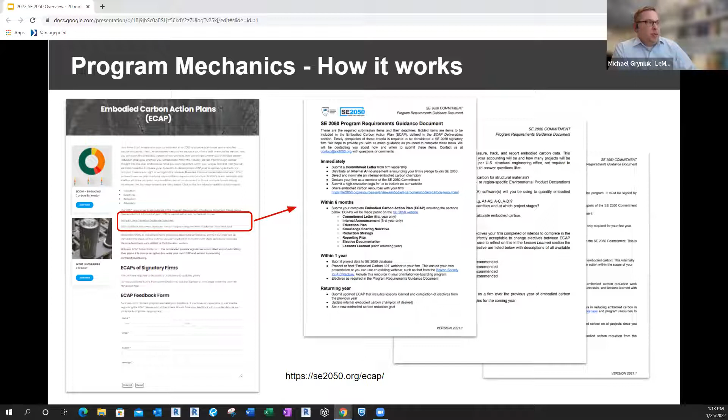A central component of that is of course the ECAP, or the Embodied Carbon Action Plan, which has 4 building blocks: education, reporting, reduction, and advocacy. Each block has a minimum number of requirements, and we'll briefly touch on those in a minute. All of those requirements are in great detail in our ECAP guidance document found on our website here. I know you can't read that page, but trust me, just click that link and you'll get the program requirements.

But briefly, I'll say education is really the first step to increase the engagement within your firm. So we are requiring firms to designate a firm-wide embodied carbon champion, put together a narrative of what the firm's education plan is to educate their staff, and commit to presenting an embodied carbon 101 presentation to the firm within the first year, and putting this all in writing.

Reporting. So obviously quality data, and we will definitely get into this later, is essential to making any sort of informed decisions and developing appropriate embodied carbon reduction targets. We set a relatively low bar of entry to get more firms to commit early on in the program. And so we are only requiring 2 times the number of firm offices. So if you have 1 office, that's 2 projects a year. And if you have multiple offices, no more than 5 projects a year. In the future, we do plan to increase that number.

The requirement here on reduction strategies is that, and this is where sharing and sort of helping the greater movement, take tremendous advantage of all of our efforts by sharing the information. So we'd like firms to set internal goals and then report back on that progress, what worked, what didn't work. I don't know about you, but I personally tend to learn a lot more from hearing what hasn't worked than really just seeing these really nice diagrams and sort of the best thing that happened on individual projects. I think we've all found that we do a lot better course correcting when adjusting for some things that didn't necessarily work out.

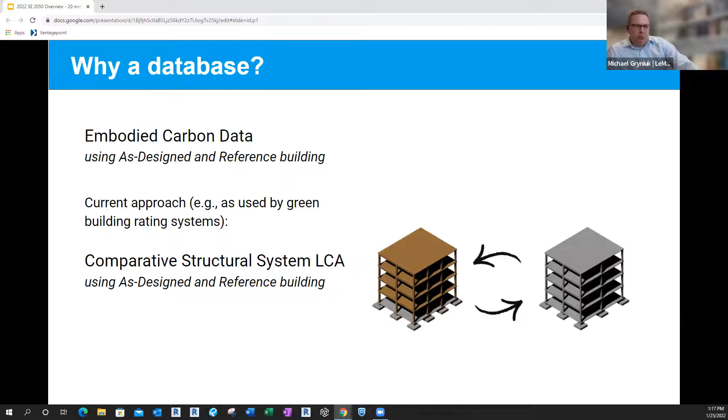I'm going to briefly talk about our database. There's a lot. I mean, we could give multiple presentations on this, but I'd like to just give a quick overview and then get into the Q&A session with the panel. So I don't think it's any secret why we might want a database. I'll say that green rating systems nowadays really require you to establish a so-called baseline building and make substantive reductions from that baseline of what would be normally designed or built, and compare it to the new project and show some sort of reduction, which is fantastic. Okay, there's no question about it.

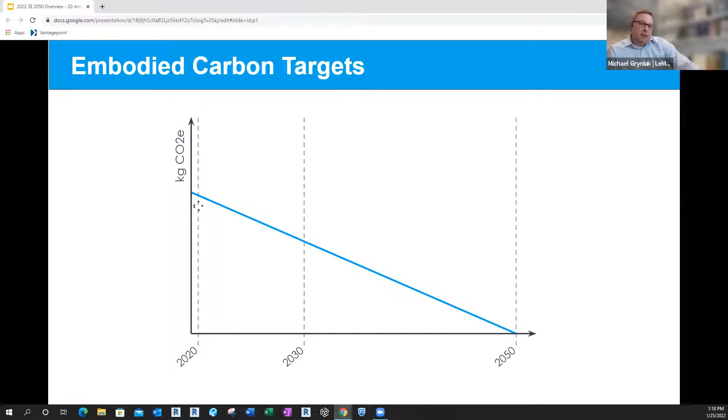But the reality is, if we have to get to net zero by 2050, which we all recognize, and frankly, maybe even before 2050, sort of reduced embodied carbon from a baseline may actually put you well above the curve. Now, this is a little bit of a can of worms. We understand that there are all sorts of project constraints and requirements and reasons why one building might have more embodied carbon than the next. But putting that all to the side, it is still important to see where your building lands with respect to the targets.

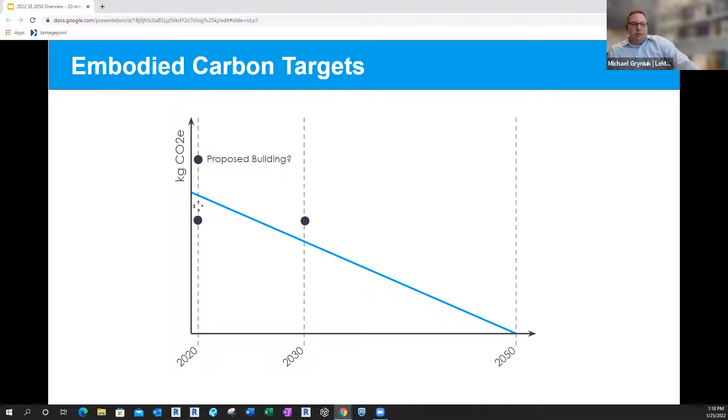Now, let's say you were in 2020 below that line. That does feel good, but what if you employed the same strategies 10 years later? You would actually be sort of above the target. Okay, so that's really the general concept of why we need some sort of database to allow us to ensure that we're sort of heading in the right direction.

There have been other database precedents put out there, and some of them good. A lot of them, frankly, at this point, identified ways to improve, and so we're trying to leverage the work that they did previously, and try to come up with a more structural focused database that makes sense to a structural engineer, isn't overly complicated, and is accessible to the profession.

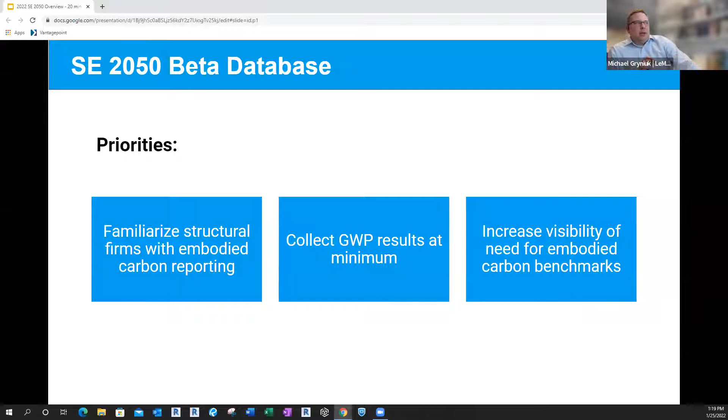So our priorities, knowing that this was our first go at it, was to just familiarize structural firms with embodied carbon reporting. We sort of have to take baby steps in the beginning here, and we're only asking people to submit global warming potential results at a minimum. Of course, we would eventually like to also collect structural material quantities, but for now, it's just global warming potential. And we're really hoping to highlight trends and the visibility of why we need to continue to track and collect even more data to establish those trends and benchmarks in the future.

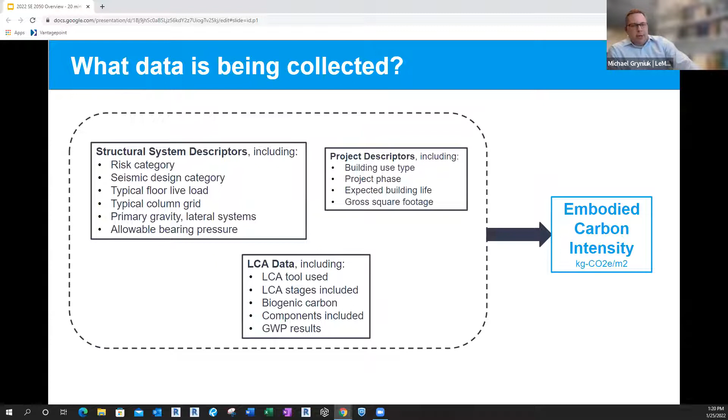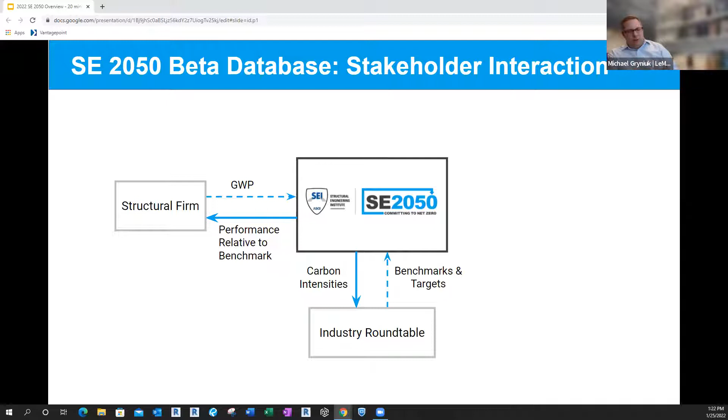Basically, this diagram is to demonstrate that we are trying to talk to as many stakeholders as possible and really talking to the industry. We're really not trying to be off in the corner doing our own thing and ignoring what else is going on. We all know that there's quite a bit going on in embodied carbon. So, the concept is that the structural firm submits the global warming potential into our database. Those embodied carbon intensities are then reviewed and discussed with an industry roundtable. Perhaps a third party group is assessing the data. Those targets or trends and benchmarks are put back into the database, and then the structural firm can review their performance relative to that information.

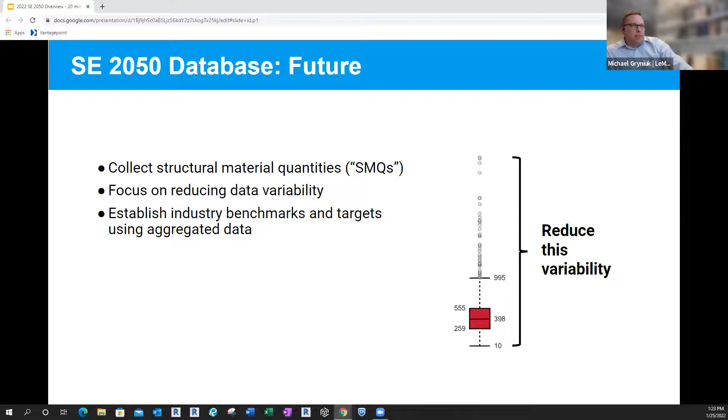In the future, we very much want to and plan to include structural material quantities for several reasons. Structural material quantities is something that structural engineers care a whole lot about. It also allows us to back check the embodied carbon numbers if they make sense. We think this will also help reduce the variability. And so there's a lot of things that we'd like to do in the future, hopefully in the next year or two. And then the concept would be if we had the SMQs from the database, those could be exported to any LCA tool that's commercially available, and then GWP numbers could be produced directly instead of having the structural firm produce the global warming potential.

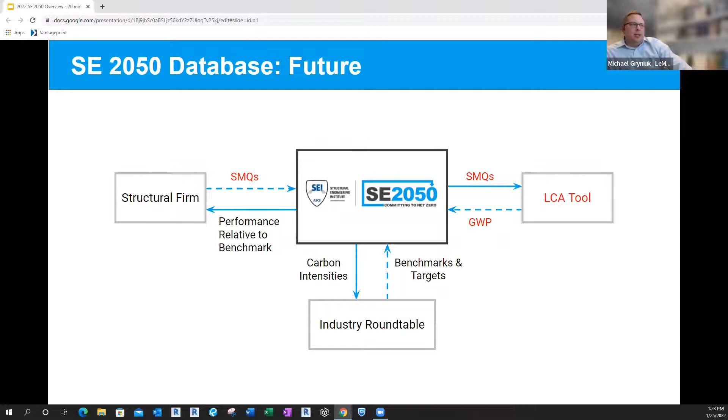We could just collect SMQs and then run it through any tool that we want while still getting industry feedback. So I'm going to wrap it there. And if we have time, I'll get into additional resources that we have at SE2050.

But for now, I'll just leave it with, here are the 71 firms committed, 70 projects submitted to the database, and at least 41, I think that number is higher now, of ECAPs received. So pretty exciting stuff. And I'm very, very much looking forward to hearing from this impressive group of structural engineers.

So with that, I'm going to stop sharing my screen and hand it off to Patrick Kenny and Michael Cropper of Thornton Tomasetti. Thank you, Michael. Hopefully everyone can see my screen.

My name is Michael Cropper. I'm a senior associate structural engineer with Thornton Tomasetti in our Washington, D.C. office. And we've got just a couple of slides to go through about our approach at Thornton Tomasetti with embodied carbon. I've been with TT about 15 years. As a firm, we've been collecting embodied carbon data on our own projects for over 10 years. And some of that data is on the screen.

Admittedly, it was a lonely experience for those who were collecting that data a number of years ago, because embodied carbon didn't even have the traction that it does today in industry. So for me as a structural engineer, embodied carbon's been new in the last 2 or 3 years. So this effort among the entire industry, and especially among us structural engineers, is new and fresh, and everybody's excited about it, which is great.

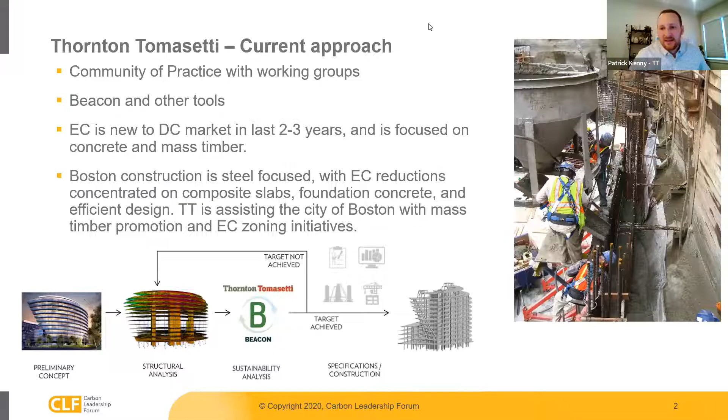I think we're teaming up KPFF now, Janet and Shana. Yep. Hi, everybody. I'm Janet Ranf from the St. Louis office of KPFF, and I'm joined with Shana Kelly from our Seattle office. And we're going to talk about how SE2050 has been incorporated into our firm. Shana will start off talking about how we got here.

Yeah, thanks, Janet. So KPFF had signed on to the 2030 Challenge a number of years ago, but when the SE2050 commitment came up, that's really about committing to something and putting down on paper what you're committing to do. And so we had the option to go in and sign the letter and say we were going to do it. But what we really wanted to do, as Mike mentioned, was bring along everybody in our office with us, including all of the leadership.

And so we actually developed our ECAP before we even signed that letter. And that ended up being this multiple page thing detailing out everything that we were planning to do. But for that to be ingested by everybody would have been difficult. So what we found really helpful was to put together a frequently asked questions document to take around to all the different leaderships and offices to answer their basic questions, which were: why is this important? What can we as structural engineers do about it? And what are we promising to do as part of joining this commitment?

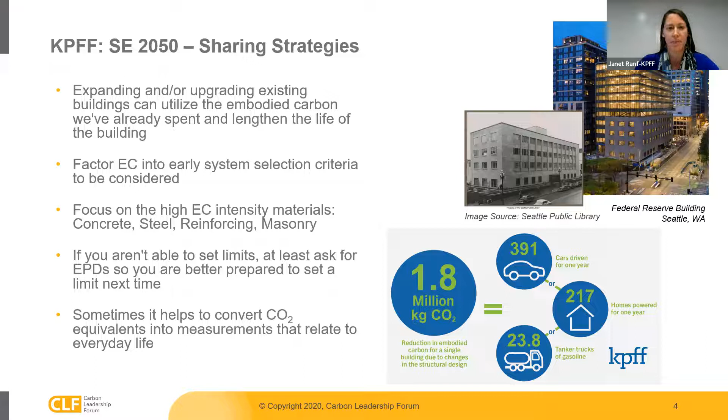How many gallons of gas, how much can you heat a home for this amount of embodied carbon? So we're engineers, we like quantifying the impacts. At KPFF, we use Tally for life cycle assessment and EC3 for carbon and global warming potential tracking. We have an EC3 account that allows members across the firm, across the country, to explore the shared buildings and also easily go in and create their own project. And we're currently in the process of creating our own firm-wide database for tracking embodied carbon in our projects.

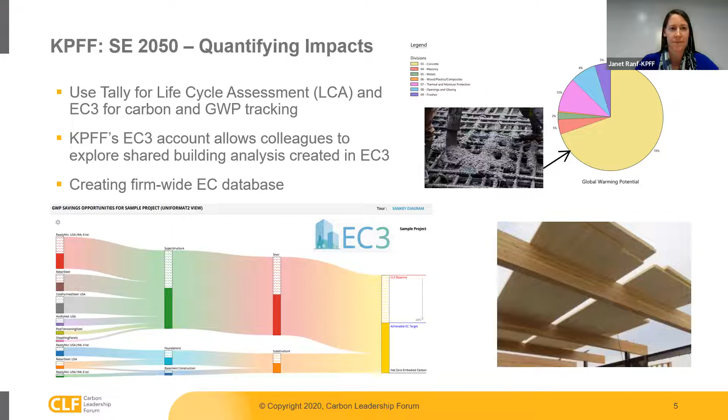We also want to make sure we're pushing the envelope and exploring new technologies. We can share ideas on the latest advancements in carbon reduction with our project teams and help explain what code and structural impacts there may be. As structural engineers, we're not often the ones who come up with these new ideas, but we certainly can help implement that into our projects.

We try to find areas in the projects that are responsible areas to experiment with the latest technologies. If we don't know how something is going to behave, we want to make sure it's not in a highly exposed, visible area. This is, again, something where our architectural partners can help us come up with areas that may be a spot that we can go and kind of play and experiment with these new technologies.

We want to explore unique systems that might be able to reduce quantities in the structure. For instance, could a hybrid system allow you to do more reductions in structural quantities? There's a picture there of some hybrid CLT testing that we did at the University of Washington, where the CLT acts compositely with the concrete.

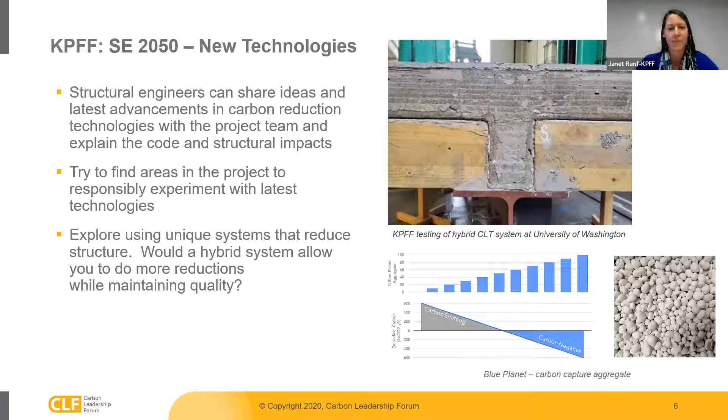So bringing it back to the Midwest, where sustainability may not be on the forefront of every owner's mind, structural engineers can initiate the sustainability conversation with the design team. This, I think, may be one of the best things to come out of SE2050, besides all this glorious data, is really pushing the structural engineers to be the ones to advocate for sustainability.

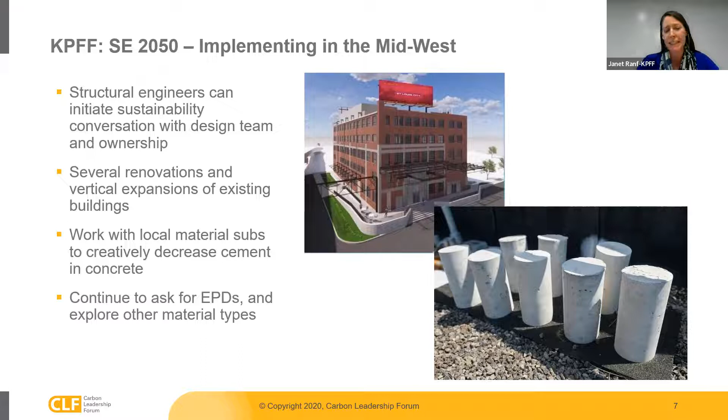In St. Louis, where I work, we do several renovations and vertical expansions to existing buildings. We try to work with local material subs to creatively decrease the cement in concrete and get a lower embodied carbon material. And we're continuing to ask for EPDs, like I said, that may actually end up giving us a lower embodied carbon material anyway, and also push our owners to look at different material types.

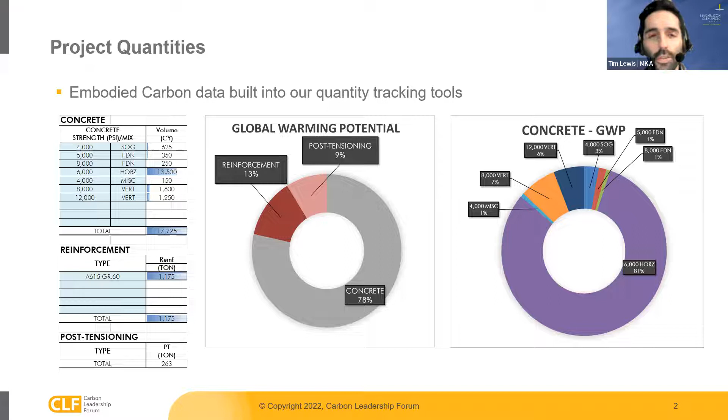There's a lot of variability in materials, and the point here being that we want to build mechanisms and tools and put these choices into the hands of our engineers so that we can make informed choices with our client, and basically giving them options, different systems to consider.

And every building's different. This is an office building and timber works well for it, but a stadium or an arena or a high rise, all are going to have different answers. And so it's important to us to have the right tools in place that have the right embodied carbon numbers so that we can consider these alternatives.

And so building these tools out has been a huge effort that we've undertaken at MKA, and it's yielded some really great results where we can pretty quickly come up with these types of pieces of information to make good decisions in our projects.

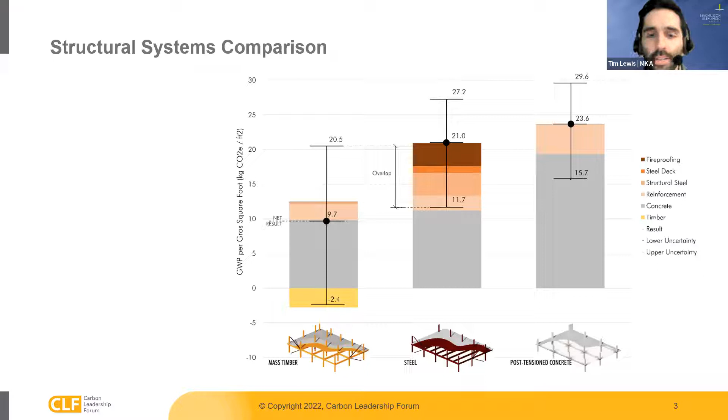So compiling the data is the first step and fairly straightforward. Essentially, quantities times GWP equals embodied carbon, but data is only useful if it's quality data, and that's the challenging part of the puzzle. SE 2050 has done a really great job of starting to create a database that spans different regions, different firms, project types, but it's important that the data being compared in the database are apples to apples. Within whole building life cycle analyses, for example, there's a lot of uncertainty and speculation.

The number in the database doesn't necessarily paint the full picture of a project. For example, are we all considering the same lifespan of a project? Some quantities might just quantify the product stage A1 through A3, while others consider the entire end of life and replacement of systems on a different design life.

So we look forward to partnering with SE 2050 and other structural engineering firms to come up with standards and a sort of a basis of analysis. And we're excited for this two-way street with SE 2050.

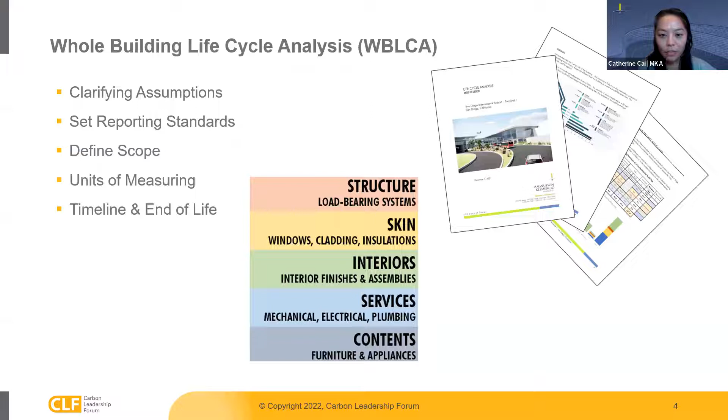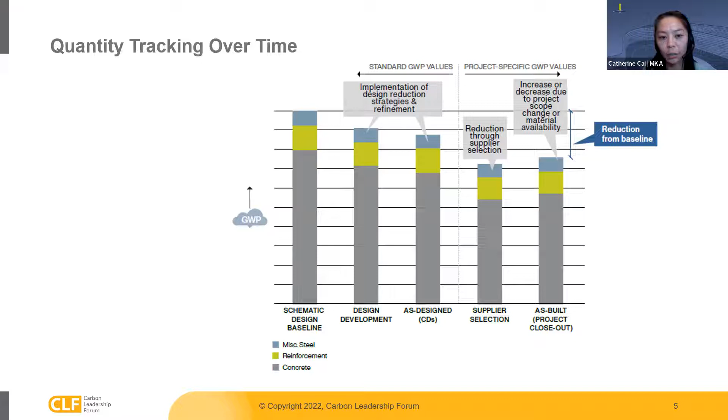Within MKA, we've seen a lot of potential through managing a project like a budget, treating carbon like money. So in this graph, you can see moving left to right through different project phases, we have seen opportunities to implement design reduction strategies throughout the design stage, and then even going into supplier selection and vendor selection. Overall, we've seen a reduction from our baseline simply by talking and asking about sustainability within a project.

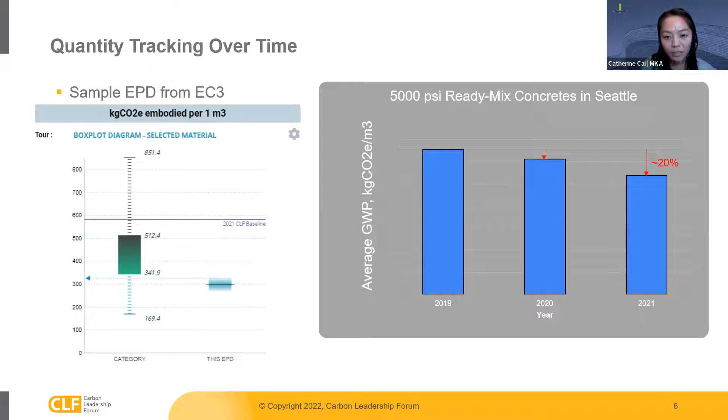And we've also at MKA decided to start this MKA Foundation, in which we are investing not just time and effort, but also proper money to fund embodied carbon research and try to make technical advancements and look at hybrid structures, a lot like what the KPFF team was discussing.

And I think collectively, it's fun to look at all this happening across the industry and feel like we're each sort of pushing for these unique solutions and trying to get a lower carbon answer so that we can all share the results and drive that result together. And with that, I think this SE2050 is a wonderful space to do it in. I think putting all of our heads together and sharing what works, what didn't, here's how we measure things, what's our baseline, those conversations are all super productive.

And we also look at this as something that's very integral to our practice. It's a space where structural engineers can lead because we understand the quantities in our buildings, and the better we understand those quantities, it's basically a better result for the project. We're building with less material. We can sort of drive this whole conversation towards carbon neutral buildings.

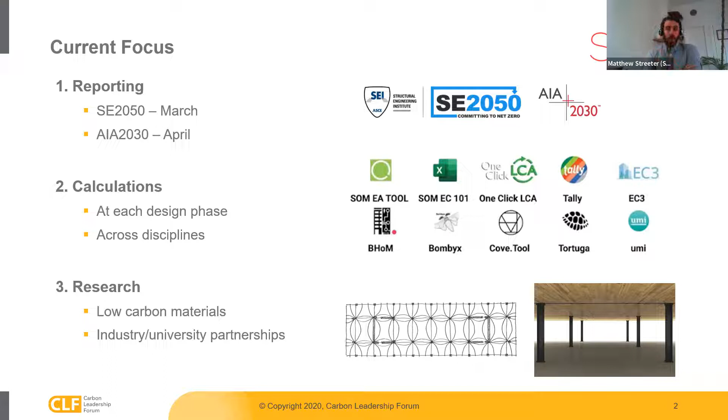And then the third area of focus is in our research group. So we're trying as much as possible to have initiatives in which we're working with partners from industry, but also from academia, to try and find low carbon materials and explore new structural systems that could potentially help us to reduce embodied carbon as much as possible.

And I think what we're seeing, and it's probably a common theme among the firms here, is along different heights, and that could be expanded to different areas, different hazards, different programs, there's a lot of different solutions. So for this height example, at a smaller scale building, we do have more opportunities to use low carbon materials like timber, and from a code perspective, it's a lot easier to get into construction.

As we move to taller buildings, we see there's smaller decisions that we can make, but from a variety of constraints, there's only certain decisions we can make, and our reductions are maybe not as huge as we would like. And then as you move to very tall buildings, again, those constraints become even tougher, and we can make decisions on form to reduce wind loads, and we see a strong impact there. But we don't see that we have a solution yet to get to zero for a really tall building.

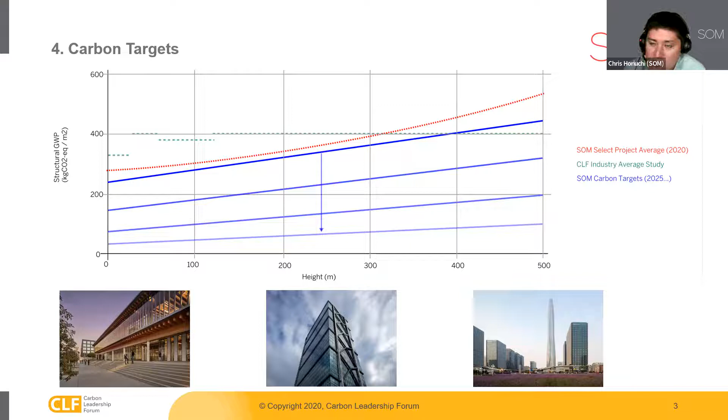So thank you. With that, I'll turn it over to Teresa at WSP. Hi, I'm here. I thought I lost Zoom for a moment.

So I'm with WSP, and we have been looking at future ready, at sustainability, at SE2050 for quite a few years. And we have just recently, in the fall, written our commitment letter to the SE2050 program. Like other firms mentioned, we had to talk about it quite a lot and look at what our business was doing already. And we felt that we could really offer a lot to the SE2050 program. Wanting to bring SE2050 beyond buildings into infrastructure was the tipping point that brought WSP into the SE2050 commitment, which I'm very excited about.

WSP is a worldwide company, and our cousins in the UK have been doing an awful lot of things in the embodied carbon world that it sort of felt like there were all these different entities of WSP doing something. So the very first thing that we felt we needed to do when we joined the SE2050 commitment was just to look within our own company and see what was happening, what we could use here in the United States, what makes sense to the business lines here in our country, and just leverage the information and products that were already being done.